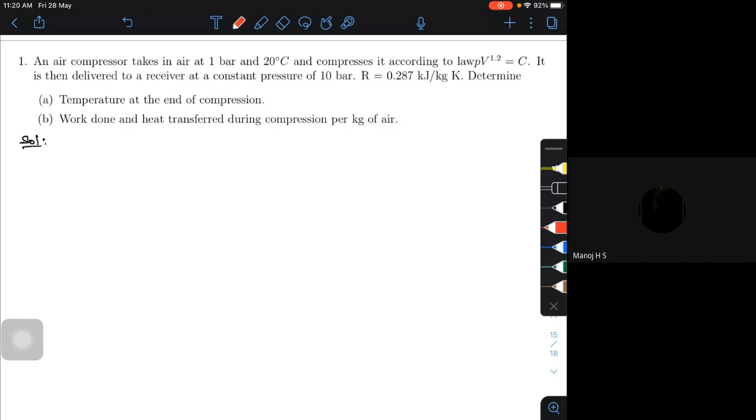So the first and foremost thing is actually, if I try to draw the TS diagram. We need to draw the TS diagram and then we will try to solve this problem. So this is my TS diagram. Or if you want, you can draw a PV diagram also, doesn't matter. Let me draw the PV diagram rather than the TS diagram.

So, PV diagram. So it is compressed, it will go to this particular point. Then this is my 1. Then it is compressed to point 2. Then it will go to point 3. Then this is 4. So this is according to the law, PV to the power of 1.2 equals constant. This is a polytropic process. This is how the compression process takes place.

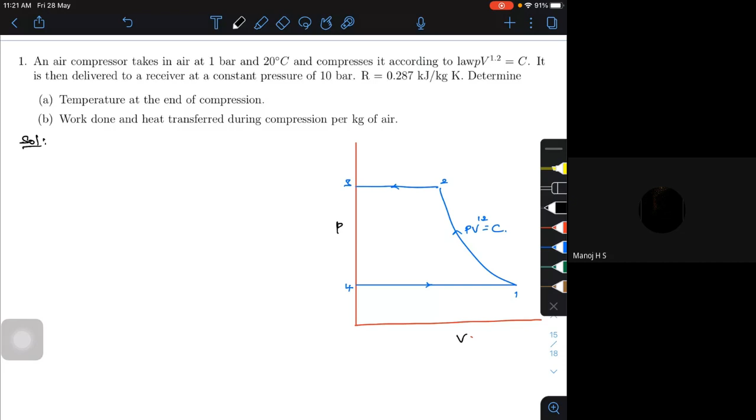So let's try to write the data given in the numerical. The first data is P1, which is 1 bar, and T1 is actually in degree Celsius, so 20 plus 273 is 293 Kelvin, and the final pressure is 10 bar, with R equal to 0.287 kilojoules per kg degree Kelvin, and mass is 1 kg. So this is what is given, per kg of air.

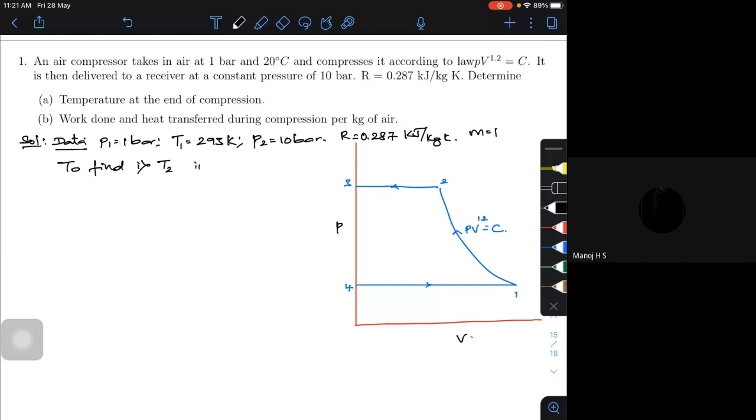What we are supposed to find is, first, what is the temperature at the end of the compression. What is it actually? So you are compressing from 1 to 2, so this should be T2. And the second one is work done and heat transfer, Q.

So now if I try to follow the polytropic process, we know that T2 by T1 equals P2 by P1 whole to the power of n minus 1 by n. So P2 is 10 and P1 is 1, and n is 1.2, so n minus 1 by n is 1.2 minus 1 by 1.2. So I am getting around 1.468, or if you want you can round it to 1.47.

Therefore my T2 is equal to 1.468 into T1, where T1 is 293 Kelvin. So if I substitute that, I am getting roughly around 430 Kelvin. 1.468 into 293, I get around 430.124, that is 430.12 Kelvin. Or if I want it in degrees Celsius, it is roughly 157 degrees Celsius. Okay, this is my first one, we got it.

That is your compression temperature. Now how to find the work done actually? So just now we know the expression, the work done is given by, this is a single stage. Work done is given by the expression.

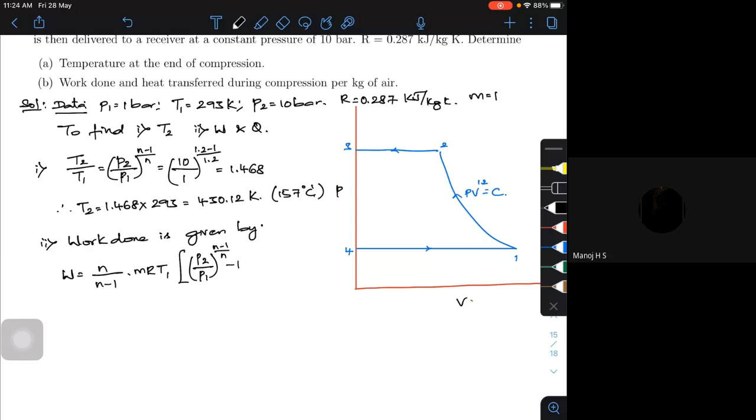W equals n by n minus 1 into P1 V1, I can write, or MRT1, doesn't matter, because I have temperature, I will write it in terms of T1. I don't want to find V1 once again, so I can write in terms of MRT1, into P2 by P1 whole to the power of n minus 1 by n, minus 1. So this is already, we have derived this particular expression for a single stage.

So what I am trying to do is, this expression is actually P1 V1 because we know P1 V1 equals MRT1, that's why I'm writing MRT1 in terms of P1 V1. So we know all the values. If I substitute R in terms of 0.287, directly I'll get the work done in kilojoules. If I substitute R in joules, I'll get work done in joules. So I'm going to substitute in terms of kilojoules.

So if I substitute, this will be 1.2 divided by 1.2 minus 1. So mass is 1 kg, substitute 0.287, and temperature is 293. I'm trying to substitute in terms of Kelvin. Then P2 by P1, that is 10 divided by 1, whole to the power of 1.2 minus 1 divided by 1.2 minus 1. If I substitute everything in my calculator, I'm getting around 236.13.

236.13 kilojoules per kg of air. When air is the working substance, it is per kg because mass is 1 kg. I'm writing the value in terms of kg.

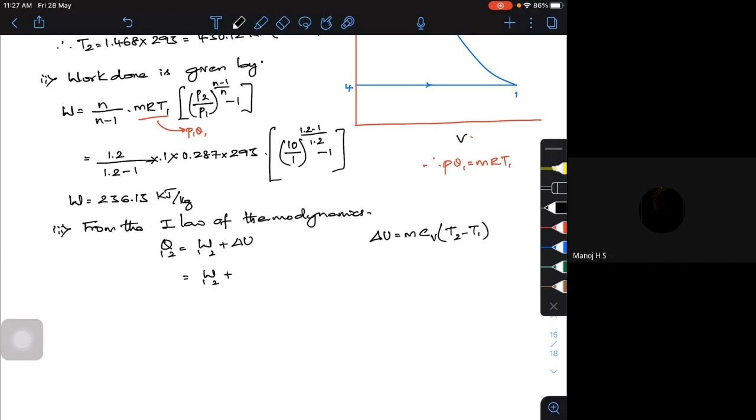That I'm going to substitute here. So this will be W, this thing. M is 1 kg, I will substitute CV into T2 minus T1. So this is actually 236.13 kilojoules. CV, what can I do actually - CV for air is actually 0.718 kilojoules per kg degree Kelvin, or you can put 0.72 or 0.718. If I put 0.718, since that's also in kilojoules, I'll be getting the final value in terms of kilojoules.

So what is T2? T2 is actually 430.12, minus T1 which is 293. One thing you have to remember here - what is your work done actually? Work done is negative. You have to remember this is W12 is negative because it is a compressive work. So I have to put it as negative here. This will be minus 236.13.

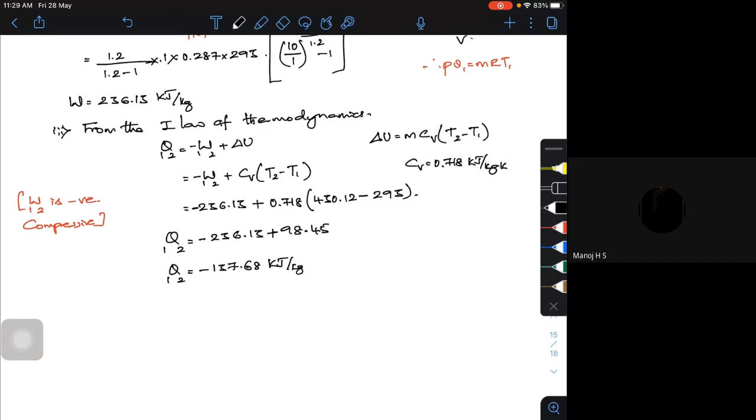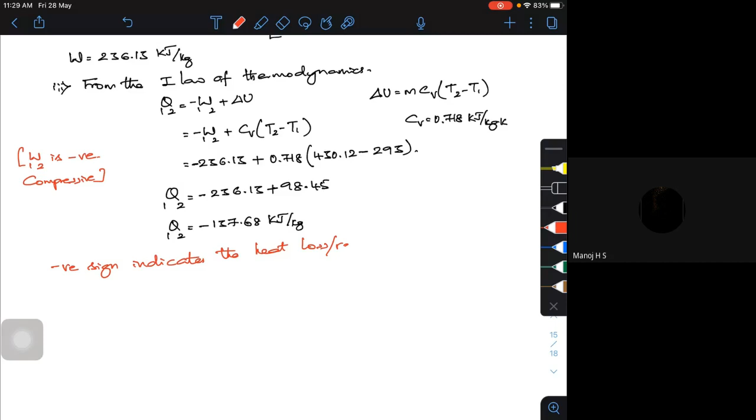plus 98.45. So I'm getting around minus 137.68 kilojoules per kg. That means, the negative sign indicates the heat loss, indicates the heat loss or heat rejection, whatever it may be, from the compressor.

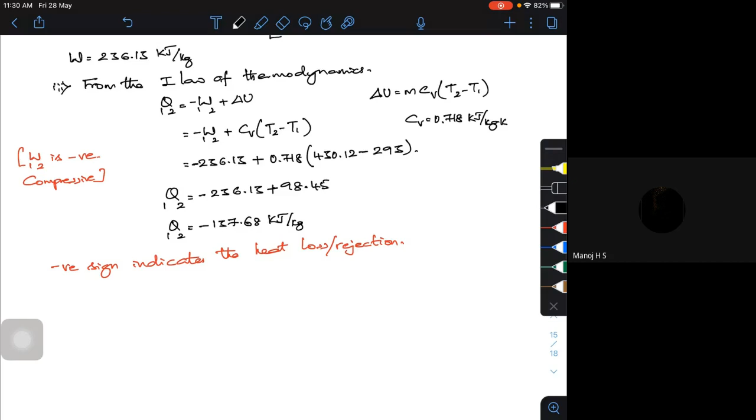Is that clear? If you want, a few books I have seen - what they put actually, they try to put work done is equal to P1V1 minus P2V2 by N minus 1 also. So there may be a little bit slight error with it, but actually speaking, work done due to compression, this is what it is.

You have to put Q is equal to W plus delta U, and you have to put what W is - it's work because of the compression, and I have put those values. I'm trying to get these values. It is minus 137.68. Is that clear?

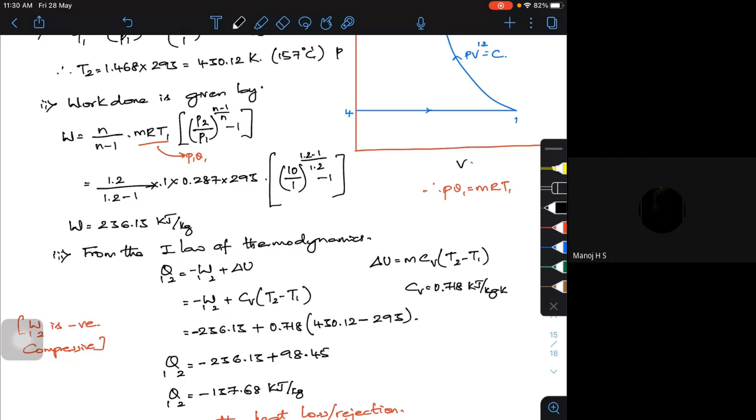If it's clear, we'll move to the next problem. Okay fine, so we'll move to the next problem, which is the second problem.

It's something like this: a single stage double acting air compressor is required to deliver 14 meter cube of air per minute, measured at 1.013 bar and 15 degrees Celsius. The delivery pressure is 7 bar and the speed is 300 RPM. If I take the clearance volume as 5% of the swept volume, then what will happen?

In this particular problem, I do have the clearance volume. If I try to write the PV diagram, there is a little bit of clearance, that is your VC or V3. Then we have swept volume with compression and expansion index N equal to 1.3. We are supposed to find the swept volume of the cylinder, the delivery temperature, and the indicated power. Indicated power is the work done, so multiply with mass to get the work, and then the power.

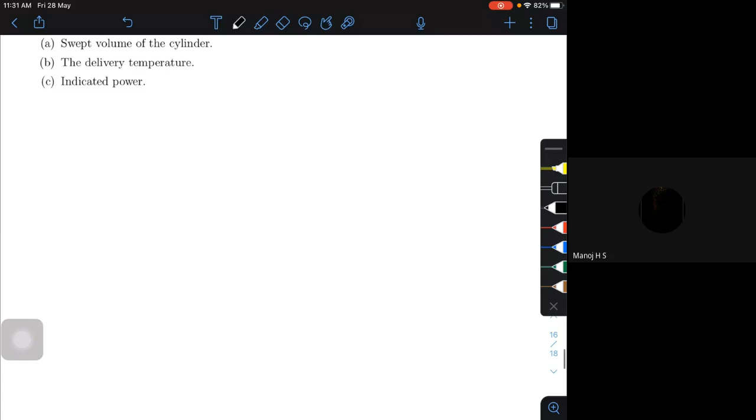Solution. Let's try to write the data that is given. The data given is actually the quantity of air delivered.

The quantity of air delivered, call it Q, is 14 meter cube per minute. The pressure P1 is equal to 1.013 bar and T1 is equal to 15 degrees Celsius, so 15 plus 273, that is 288 Kelvin. Then P2 is equal to 7 bar, and the speed is 300 RPM.

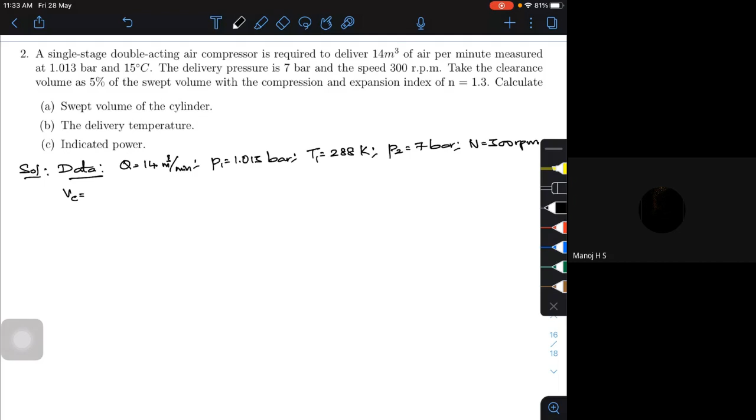Take the clearance volume, VC, equal to 5%, means 5 by 100, that is 0.05 of your stroke volume or swept volume. Then your index of expansion is equal to 1.3. So what are you supposed to find?

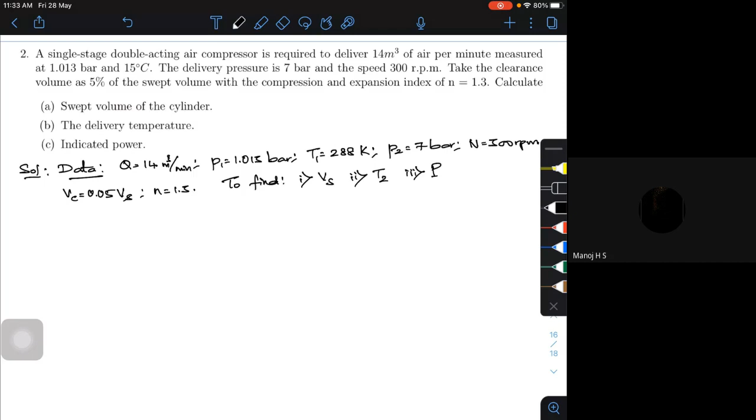We are supposed to find first the swept volume of the cylinder, second the delivery temperature T2, and third the power developed. So these three things we have to calculate. First, let's try to draw the PV diagram.

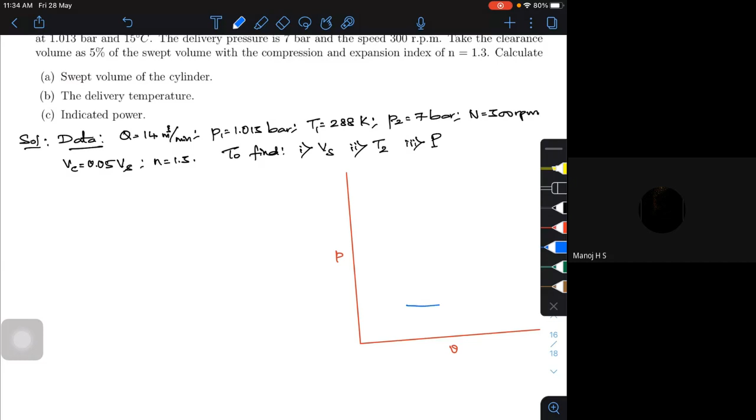This is the PV diagram. We have the pressure, we have the volume. Now we need to draw the PV diagram with the compression process, the clearance volume, and all. So this is at the lower pressure, then it is compressed, this is 1, compressed to 2, then this is my 3, then this is 4, back to the start.

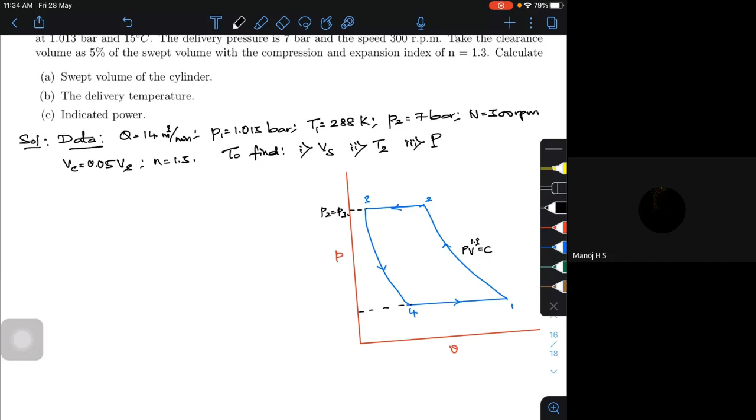This process is according to PV to the power of 1.3 equal to constant, and this is the higher pressure, P2 equal to P3, which is 7 bar, and this is my P1 equal to P4, which is 1.013 bar. Now this is my swept volume.

What is the swept volume? This is my V1, and this is my swept volume, then this is my clearance volume. What they have given is VC equal to 5% of your swept volume.

So this temperature is 288 Kelvin. I am supposed to find this T2. This is my T1 and that is my T2. That's how you are supposed to find it.

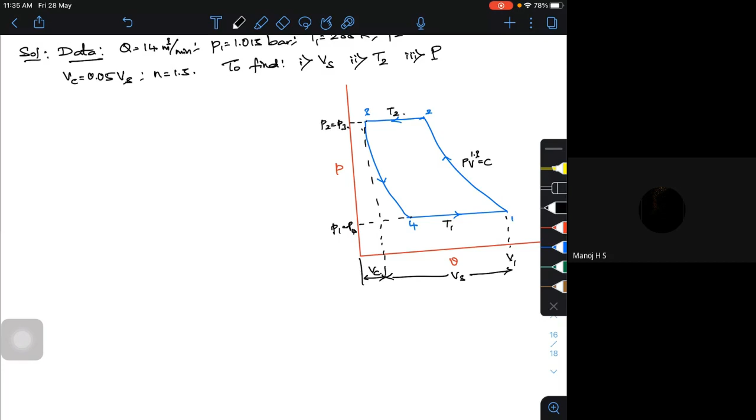So what is your swept volume? Swept volume Vs is equal to V1 minus V3, or V1 minus V clearance volume. Your V clearance is 5% of swept volume. So Vs is equal to V1 minus 0.05 of Vs, or if I take it to the other side, V1 will be equal to Vs times 1 plus 0.05, which is 1.05 Vs.

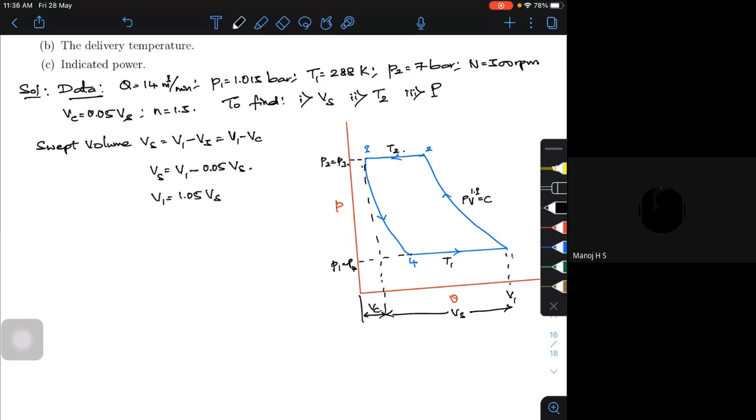Now, what is the volume induced in this particular cycle, or what is the volume of air delivered? That is V1 minus V4. This is the volume of air delivered, which you can call Vd or whatever. So volume induced per cycle is V1 minus V4.

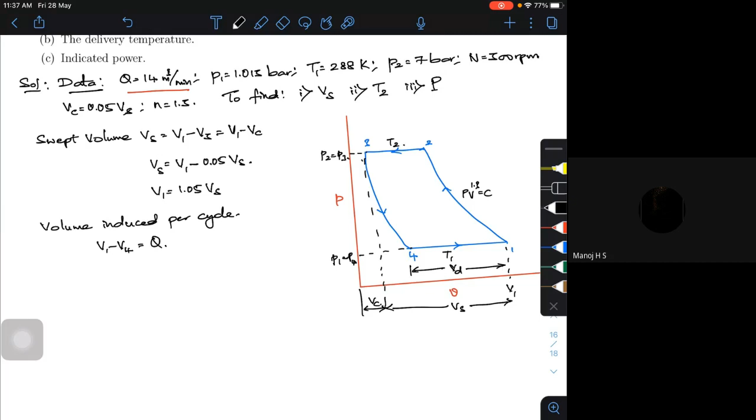V1 minus V4, what is it actually? This should be equal to your Q, the air delivered, given as 14 meter cube per minute. I have to convert it to get it into meter cube, so it is 14 divided by 300. This is a single stage double acting compressor, so I have to divide by 2. So this V1 minus V4 will be divided by N and multiplied by 2 because it is double acting.

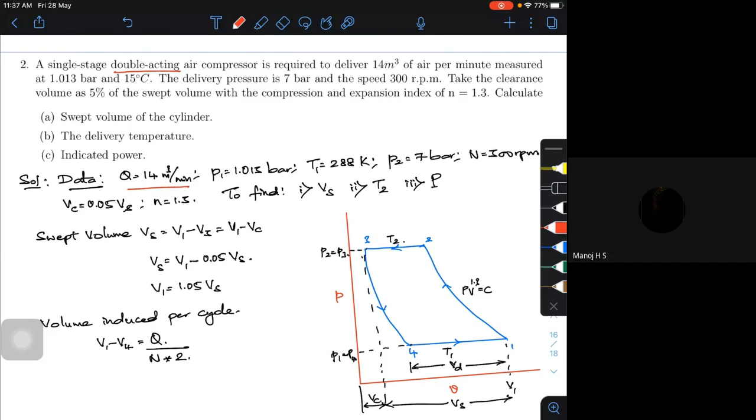If it were single acting, that would have been 1. Okay, this being a double acting, so this will be 14, divided by 300 into 2. 14 by 300 into 2, I am getting around 0.0233, or 0.023, that's enough. 0.023 meter cube. This is my V1 minus V4.

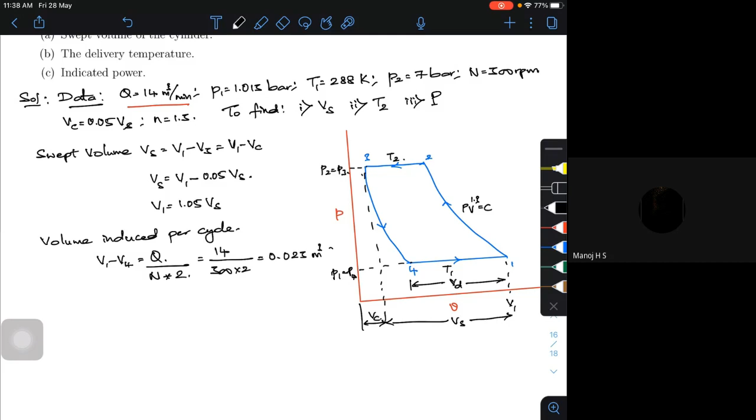But what is my, if I try to take the expansion, what is my V1? V1 is 1.05 times of Vs, already we have found. Then what is my V3 by V4, or V4 by V3?

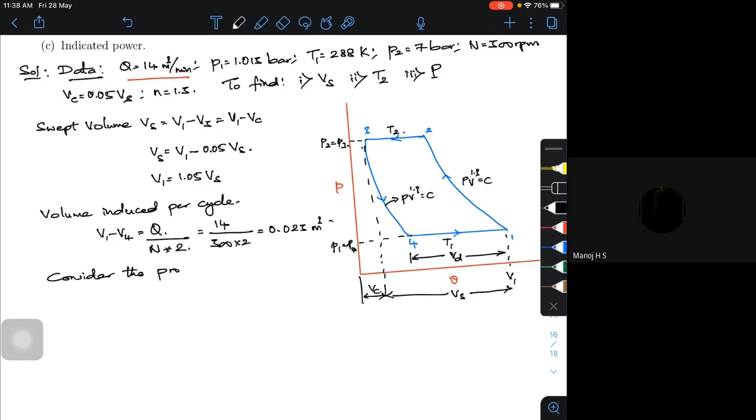Consider the process, so this is also according to PV to the power of 1.3 equal to constant. Consider the process 3 to 4. I can write the final volume, V4 by V3 is equal to P3 by P4 whole to the power of 1 by N. What is P3? P3 is equal to P2, P4 is equal to P1. Or I can write this will be equal to P2 by P1 whole to the power of 1 by N.

So what is my P2? It is 7 divided by P1 which is 1.013 bar, whole to the power of 1 by 1.3. So I am getting around 4.42, 4.423. So V4 is equal to 4.423 times of V3.

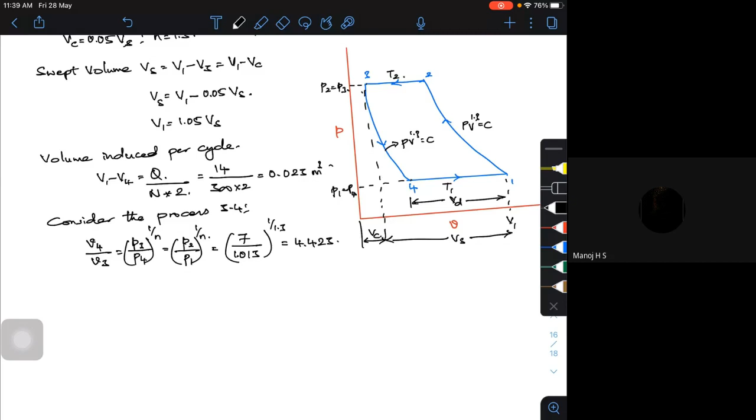V4 is equal to 4.423 times of V3. What is V3? Which is 0.05 times, that is 5% of your Vs. So I can do it as 4.423 into 0.05 of stroke volume. 4.423 into 0.05, if I do, I'm getting around 0.221 Vs. So now I got V1 in terms of Vs and V4 in terms of Vs.

Both I got in terms of this particular thing, or V1 minus V4. What is then V1 minus V4 actually? Then V1 minus V4 is 0.023. So therefore, V1 minus V4 is equal to, V1 is 1.05 Vs minus V4 is 0.221 Vs, which is equal to 0.023, or I will get Vs is equal to 0.023 divided by 1.05 minus 0.221.

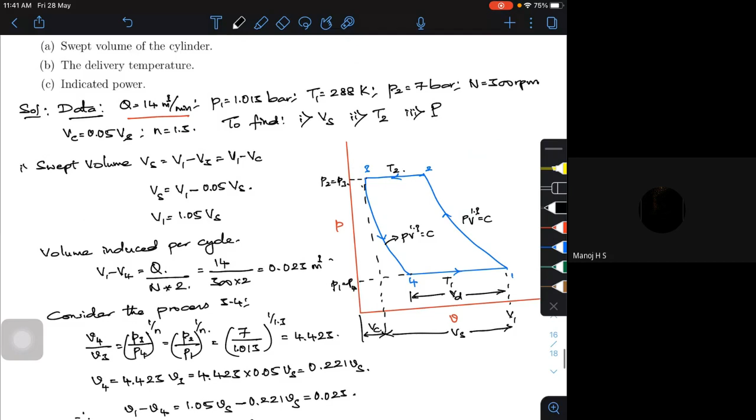Now the second one, delivery temperature, that is T2. Consider, we know the delivery temperature T2 by T1, or the exit temperature of your compression. So T2 by T1 is equal to P2 by P1 whole to the power of n minus 1 by n. Already in the previous problem also we use the same formula. So P2 is actually 7 divided by 1.013 bar, whole to the power of 1.3 minus 1 divided by 1.3.

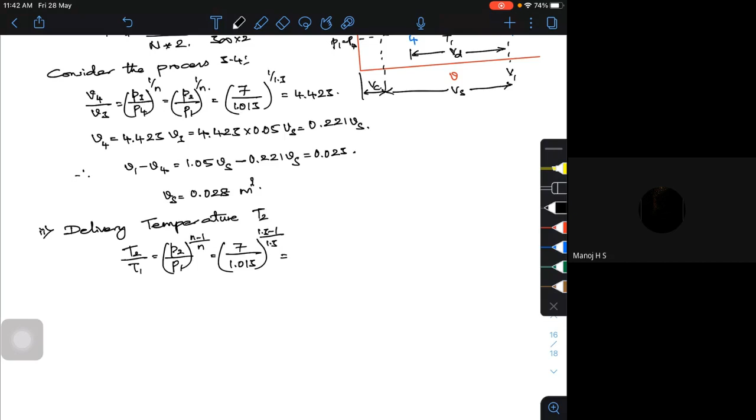So if I then multiply by 288, I'll be getting the T2 temperature divided by 1.013, whole to the power of 0.3 divided by 1.3. So I am getting around 1.562, or your T2 is equal to 1.562 into T1, that is 1.562 into 288. If I do that, I am getting around 449.9, so roughly 450 degrees.

449.9, I can write it as 450 degree Kelvin. Okay, 450 degree Kelvin, or if I want in terms of degree Celsius, it will be minus 273. If I do, this will be 177 degree Celsius. So this is the temperature of your exit, or the compression temperature.

Now how to find the power actually? So you know that work done per second is the power. So now if I multiply by mass flow rate, if I try to multiply, you see, work done per second is the mass flow rate. So work done itself is nothing but, say, kilojoules, whatever, directly you are getting kilowatts or something. So that itself is your power produced or indicated power. So the indicated power formula, the indicated power.

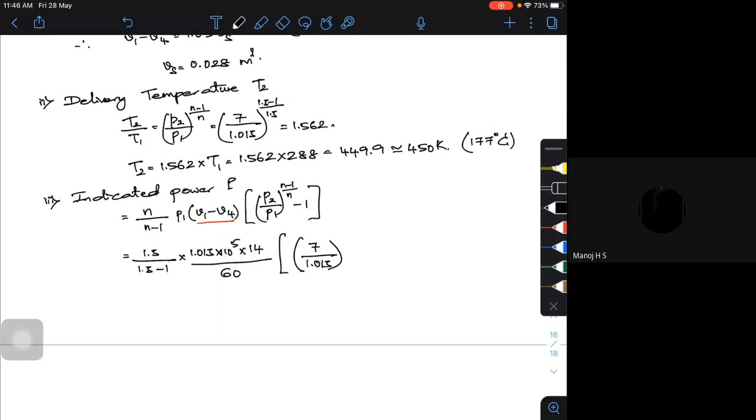Okay, that is 0.233, into your P2, that is 7 bar divided by 1.013, P1, that is 1.3 minus 1 divided by 1.3 minus 1. Okay, so I am getting around, I try to substitute everything, so I am getting around 57.56 kilowatts. This is my indicated power.

So all the quantities, whatever is asked, we are able to do it. Is that clear?

So the same problem, if they ask you to find volumetric efficiency, what you will do actually, the same problem. Say for example, if they ask you to do volumetric efficiency, it's volume of air delivered divided by swept volume. What is volume of air delivered? V1 minus V4. What is swept volume? Vs.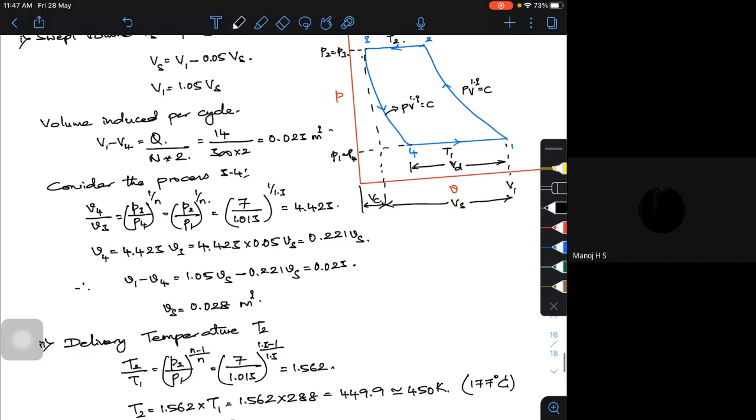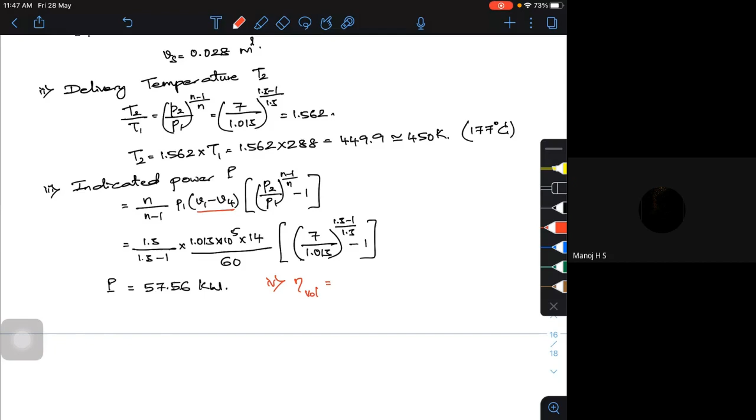So if I try to take the same thing, V1 minus V4, that's 0.023, and what is my Vs? So Vs is equal to 0.028. If I just simply take the ratio of it, I'll write it here. So it's not given in the problem statement, but if they ask you to find volumetric efficiency, it is volume of air delivered, that is V1 minus V4, divided by Vs, that is 0.023 divided by 0.028, into 100, it will be 82.14%.

They can ask to find volume, find also the volumetric efficiency. So just take the ratio of that, you'll be getting 80% or 72% depending upon the numbers. Volume of air delivered to swept volume will give that particular thing. Is that clear? Any doubts?

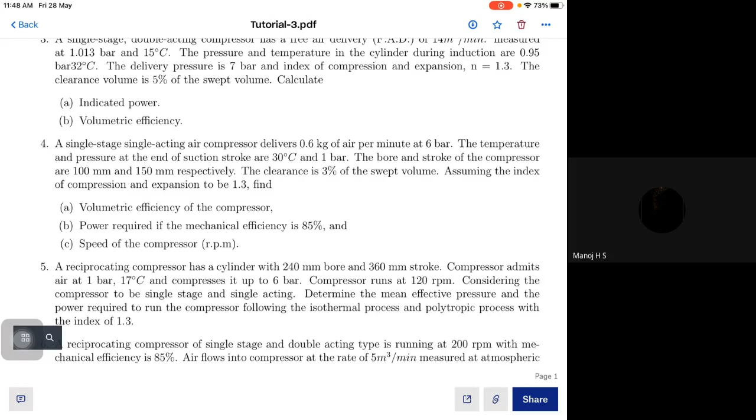Not. We'll try to look into one more problem. Anyway, the third problem is like that only. Rather than solving that volume, one more problem, so in this I gave you the idea, you people can solve it. So let's take the next problem, that is a single stage, the fourth problem. Okay, fourth problem we'll take and try to solve.

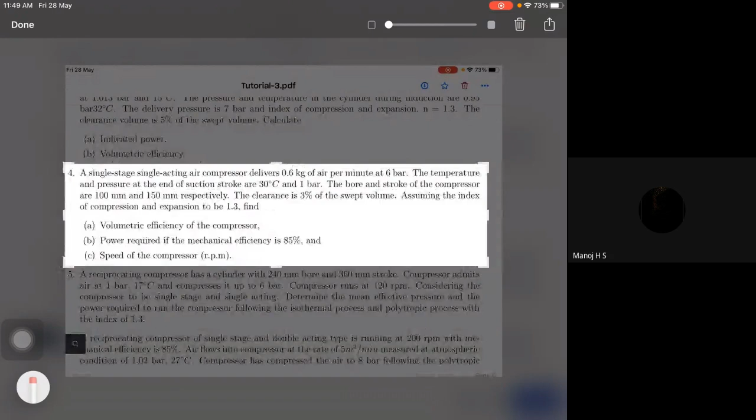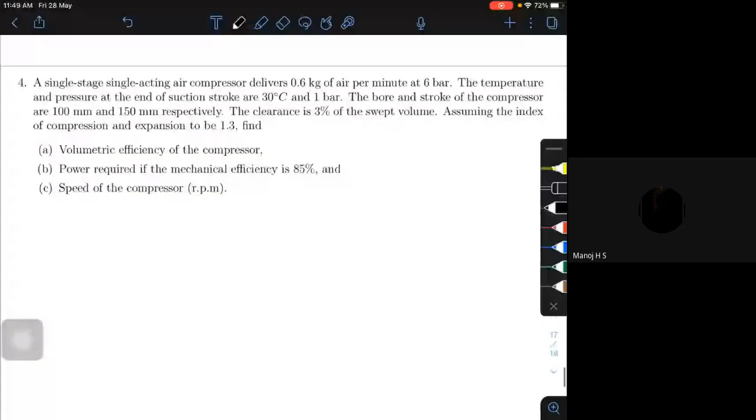Okay, the problem statement is something like this. A single stage, single acting compressor delivers 0.6 kg of air per minute at 6 bar. The temperature and pressure at the end of the suction stroke are 30 degrees Celsius and 1 bar. The bore and stroke of the compressor are 100 mm and 150 mm respectively. The clearance is 3% of the swept volume. Assume the index of compression and expansion to be 1.3. Find the volumetric efficiency of the compressor, power required if the mechanical efficiency is 85%, and the speed of the compressor.

So here they have not given the speed of the compressor. You are supposed to find the speed of the compressor. Okay, now one more thing.

You all know that we have derived one formula to find the volumetric efficiency, that also you can use. What is it actually? 1 plus C into 1 minus (P2 by P1) whole to the power of 1 by n. Hope you remember, what is that C? C is the ratio of the clearance volume to swept volume, VC to VS. So that formula also you can use and get it directly. We'll try to use that formula in this particular problem and solve the numerical.

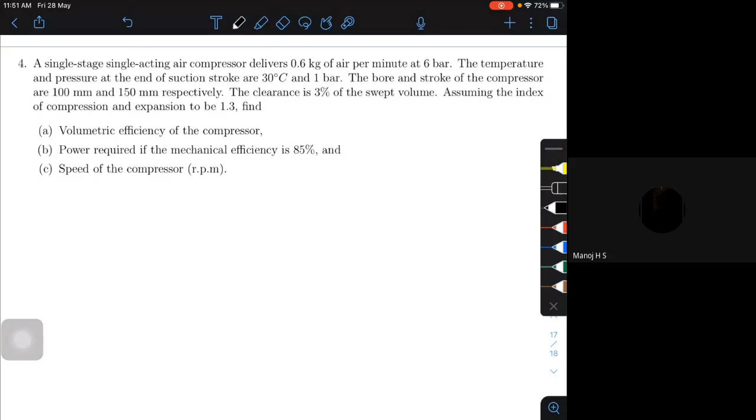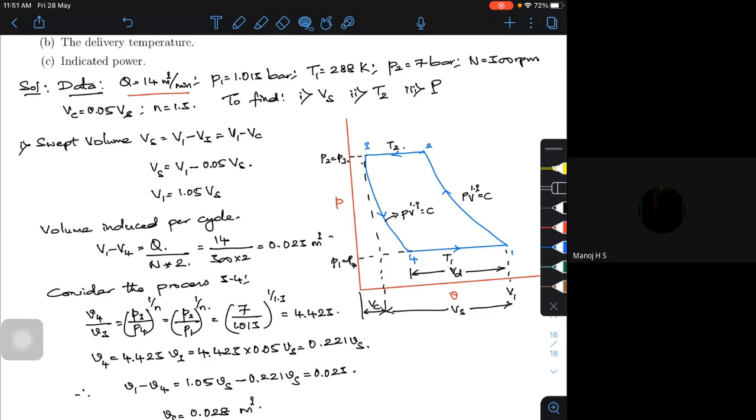See now, to find the speed actually, you need to consider the displacement volume. So displacement volume should be based on your free air delivered, or what is the amount of air that is delivered, based upon that I should be able to do that. So that's the only change. So for the third one, we need some kind of changes actually. Remaining, first and second, it's the same actually. So what I will do, I will take the same PV diagram, this is the same PV diagram, and try to solve it.

Okay, the PV diagram looks very similar to what we have solved already. Now it's 1.3, so n is equal to 1.3. There also at 1.3, here also 1.3.

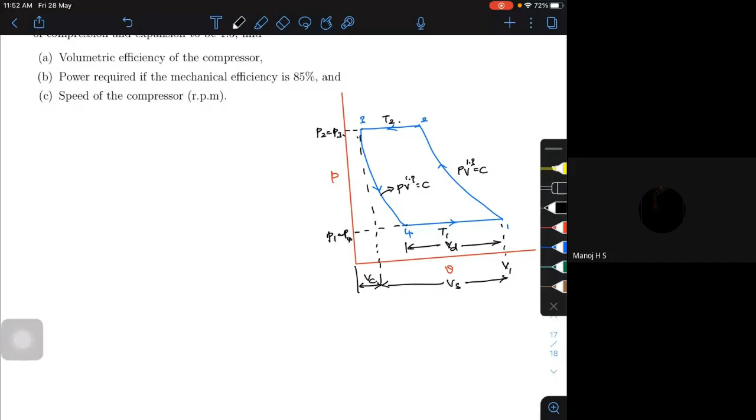So here the mass of air delivered is actually... what is given actually? Let's try to write the data. What is given? Solution. What is the data that is given?

So the data is your mass flow rate, it is 0.6 kg per minute. If I want in terms of seconds, divide by 60. Then the higher pressure, that is P2, which is actually 6 bar, and P1 is actually 1 bar, and T1 is equal to 30 degrees Celsius.

So 273 plus 30, it is 303 Kelvin. They have also given the stroke and the diameter of the bore, so D is equal to 100 mm, that is 0.1 meters. The stroke length is equal to 150 mm, or 0.15 meters. The clearance volume is 0.03, that is 3 by 100 of your stroke volume or swept volume. And they have given the mechanical efficiency as 85%.

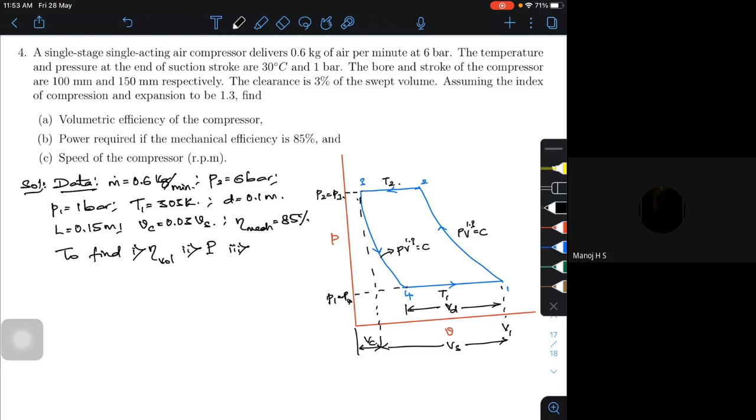This is what they have given. So what are you supposed to find? We are supposed to find, first, the volumetric efficiency; second, the power required; third, the speed of the compressor. Now let's try to find the first one, the volumetric efficiency.

I'm trying to solve different variety of problems, whatever is there. So for volumetric efficiency, we already derived this particular formula: volumetric efficiency is given by 1 plus C into 1 minus P2 by P1 whole to the power of 1 by n. What is C? C is the ratio of Vc to Vs, which for this problem is 0.03. Already we have got it from the problem.

What is P2? It is 6. What is P1? It is 1. If you want, you can open the bracket, so then it will be 1 plus C minus C into P2 by P1 whole to the power of 1 by n. Whatever way you want, you can do it, since we already derived it.

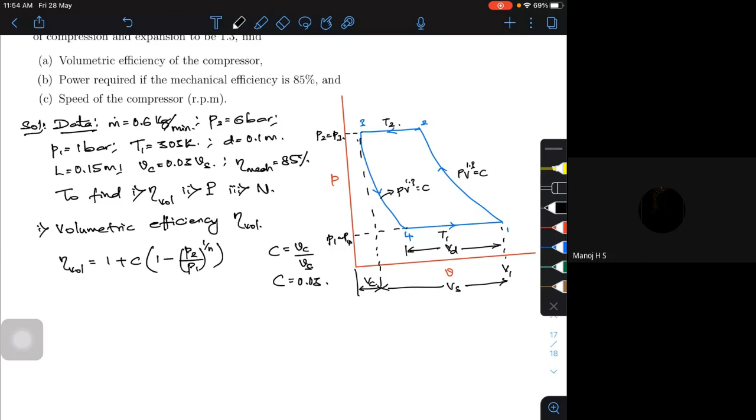So let's use that. This will be 1 plus 0.03 into 1 minus 6 by 1 whole to the power of 1 by 1.3. So this is my volumetric efficiency. I'm getting around 0.9109, or roughly 91.1%, if I round it off, roughly 91%. It's a good number, 90% is a good number, 91%.

Now what is your power required? Same as that of your previous problem. The power required to drive the compressor - what is the formula? Already, so this being a single stage...

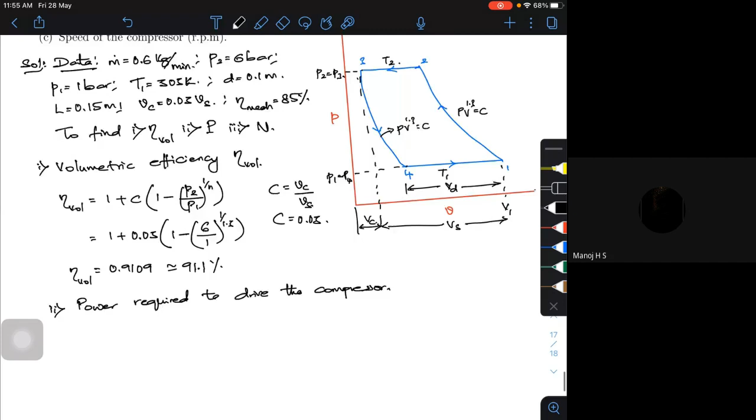So the previous one, being a single stage, I can use MRT1. If you go back and see here, P1 into V1 minus V4 I use. Actually V1 minus V4 is actually your mass flow rate. Either I can use this formula or I could have used MRT1. So I have to use this particular formula to get it.

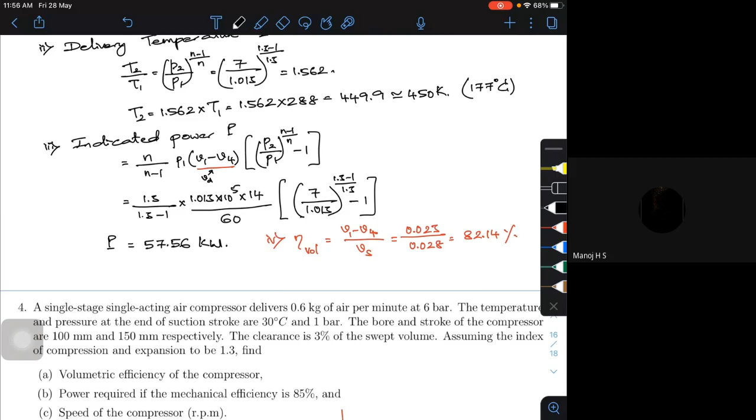So here if you look at it, V1 minus V4, what is it actually? I am trying to get it in terms of mass flow rate. So P1 V1, this particular V1, this is the discharge, so this is my volume of air delivered or discharge, I call it VD. So now I can write that, this is nothing but VD, the discharge volume. In this problem, they have given it in terms of mass directly, which is 0.6 kg per minute.

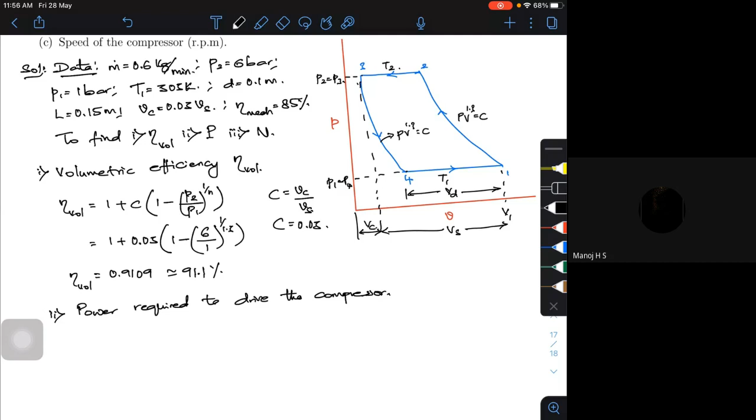So I can directly use the MRT1 formula. Depending upon what is given, I should use it accordingly. So the formula will be N by N minus 1 into MRT1, into P2 by P1 whole to the power of N minus 1 by N, minus 1. So this is the formula I'm going to use.

So this will be 1.3 divided by 1.3 minus 1. Mass flow rate should be in kg per second since I want power in watts or kilowatts, so that's 0.6 divided by 60. R is 0.287, into 10 to the power of 3 to get watts, or just 0.287 for kilowatts. So 303 is my temperature into 6 by 1 whole to the power of 1.3 minus 1 divided by 1.3 minus 1.

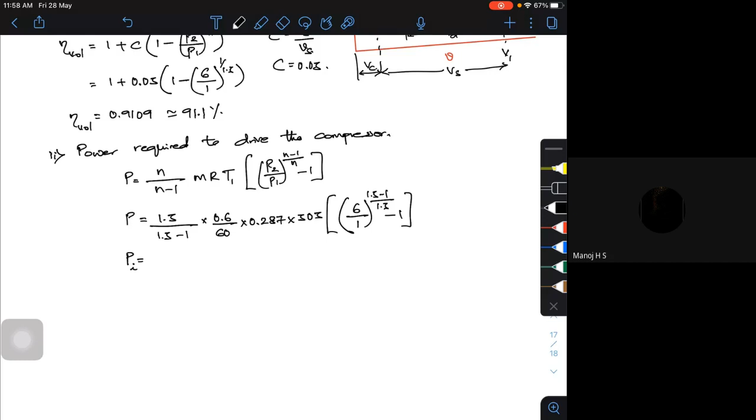Substitute everything: this is the power, the indicated power actually, or the power that is supplied. If I substitute everything, I am getting around 1.928, so 1.93 kilowatts. Now they've given the mechanical efficiency.

Power required to drive the compressor, call it PC, equals PI divided by the mechanical efficiency. That is 1.93 divided by 0.85, which is around 2.27 kilowatts.

So this is actually what is being supplied, considering a mechanical efficiency of 85%. Otherwise, in the previous problem, if I consider that as 100%, the indicated power will be equal to the power required to drive the compressor.

Now the last one: finding the speed of the compressor, N. How to find it? We have to calculate the free air delivered, FAD.

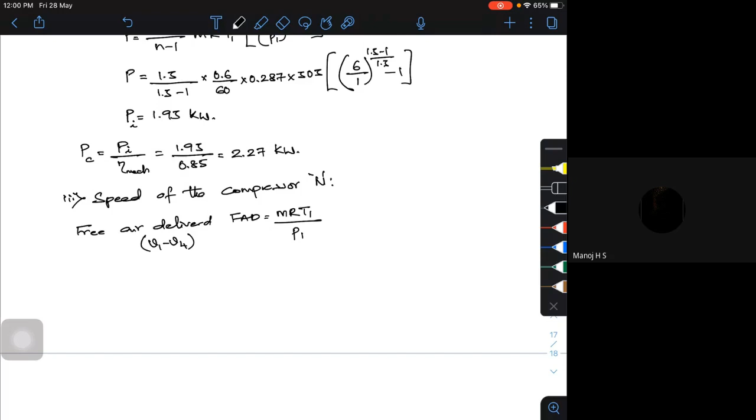This will be 0.6, and you can keep it in meter cube per minute or per second, doesn't matter, since I just need to find the displacement volume which will be the same either way. Let me keep it in meter cube per minute. So this will be 0.287 into 10 to the power of 3, into T1 which is 303, divided by P1 which is 1 bar, that is 1 into 10 to the power of 5.

If I do that, I am getting around 0.522 meter cube per minute. Now what is my displacement volume?

Volumetric efficiency equals free air delivered divided by swept volume or displacement volume. So Vs equals free air delivered, or VD, divided by the volumetric efficiency. We found volumetric efficiency to be 0.9109, so I'll substitute that.

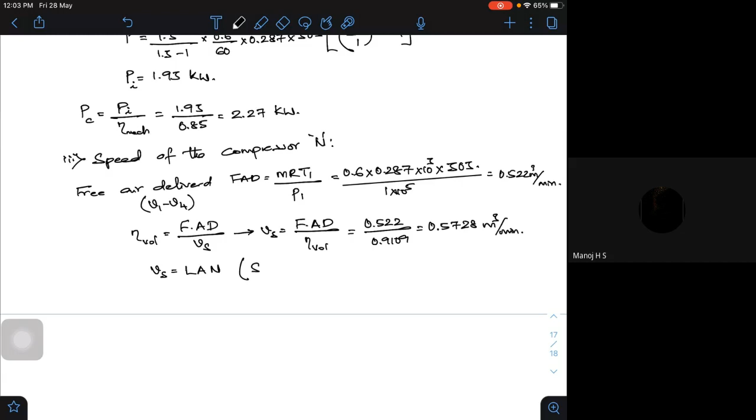So here is a single acting compressor. Let me write that: single acting compressor, it is LAN. So what will be the formula? Vs is equal to L into pi by 4 into d square into N.

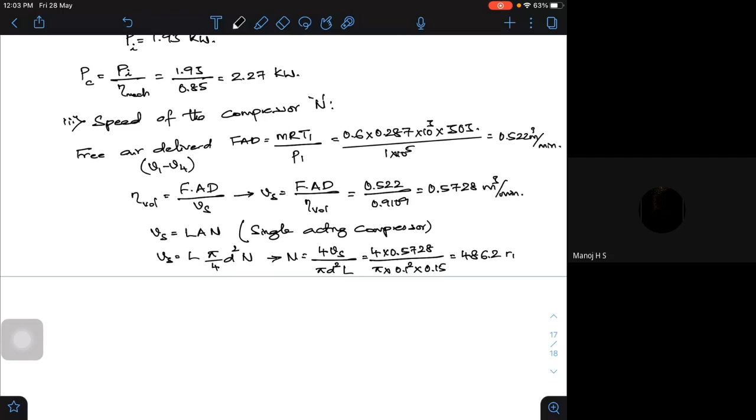Or N is equal to 4 times Vs divided by pi d square into L. So this is 4 into 0.5728 divided by pi into 0.1 square into 0.15. I am getting around 486.2 RPM. So this is the speed of the compressor.